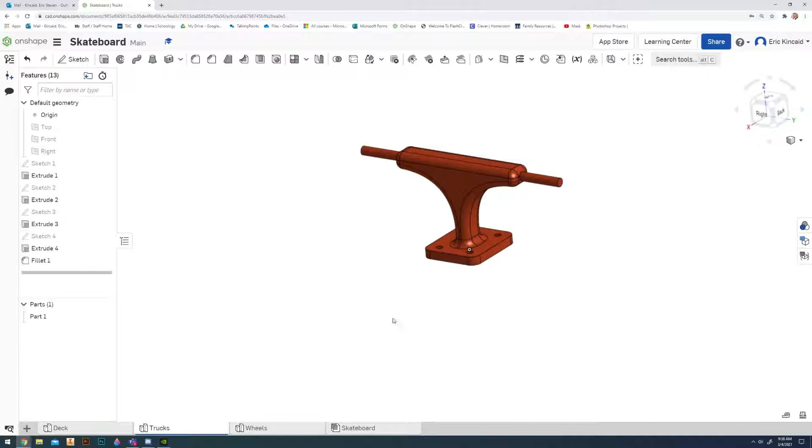All right, the other day we completed our deck for our skateboard. The next thing we're going to do are our trucks. The trucks are the thing that the wheels slide on, and then it gets attached to the board with some hardware. This part is pretty tricky, but once you see how it's completed, it gets a little easier.

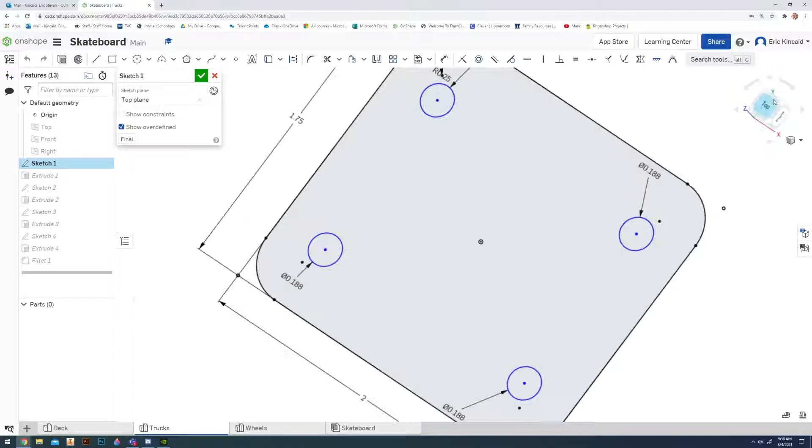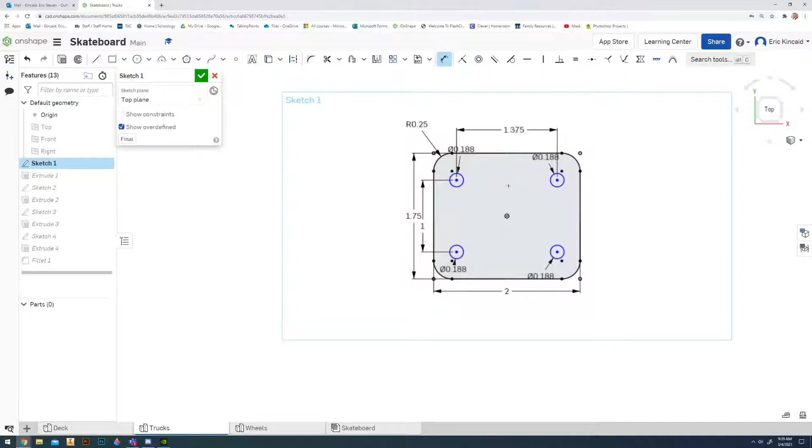First thing we need to do is take a look at our riser pad here. This is what is bolted to the board, and there are a couple different measurements we're going to need. The overall rectangle here is 2 inches by 1 3/4. It has a fillet on it that gives a radius of 0.25, and then there are 0.188, or 3/16 of an inch, holes that go through it, within a rectangle that is 1 inch by 1.375. So we actually have two different measurements here that we'll need to create.

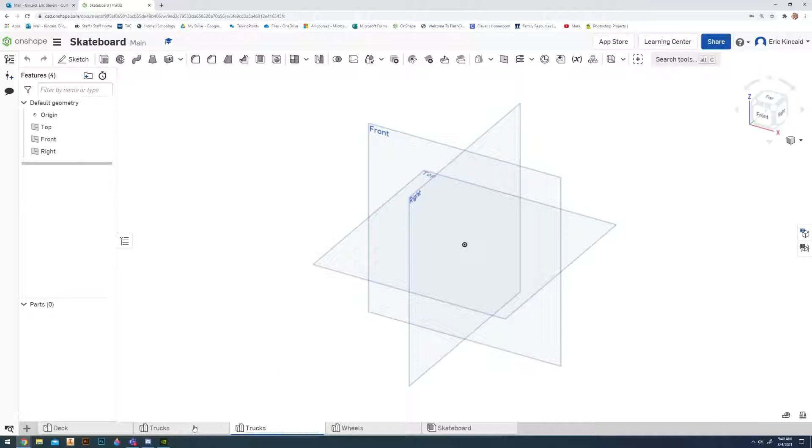Everything's based off of the origin point, so we're going to get started doing pretty much the same thing. Once you're ready, hit Create Part Studio, and we'll name it Trucks. Now obviously I have two, but that's okay. I'm going to grab my sketch, create a new sketch on the top plane, rotate my view, and instead of a corner rectangle, I'll grab a center point rectangle, click and drag out. That rectangle needs to be 1.375 by 1, and that's going to give us where to place our holes.

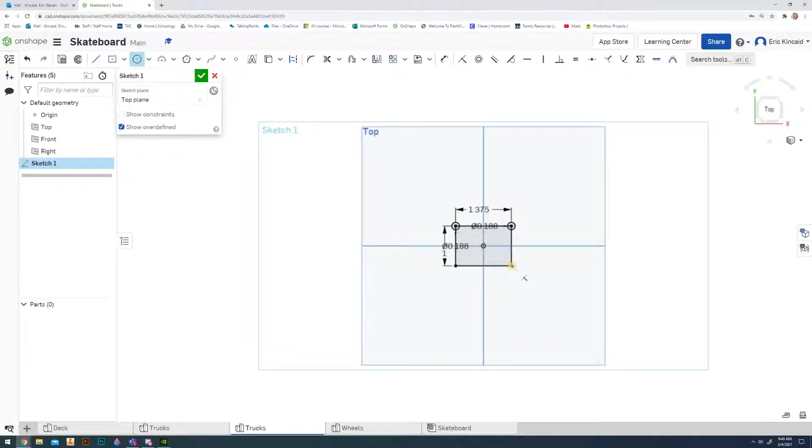1.375 by 1 - we could have made that a construction rectangle, but that's okay. We're going to grab our circle tool, and we're going to make that 3/16 on all four corners. So we just use that to position our holes - that's the only reason we did that.

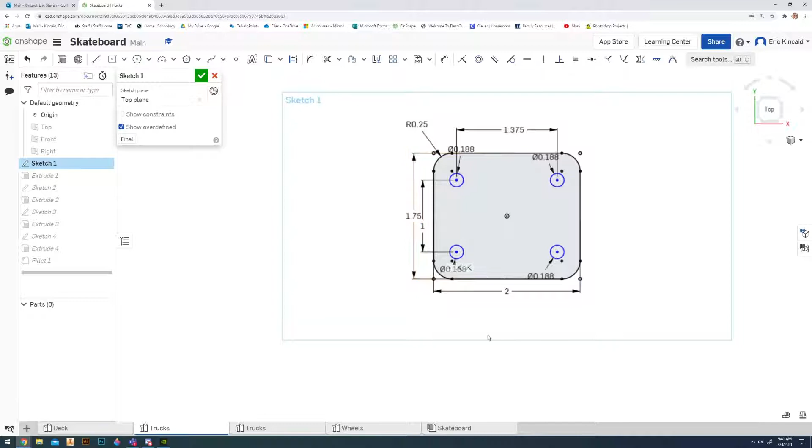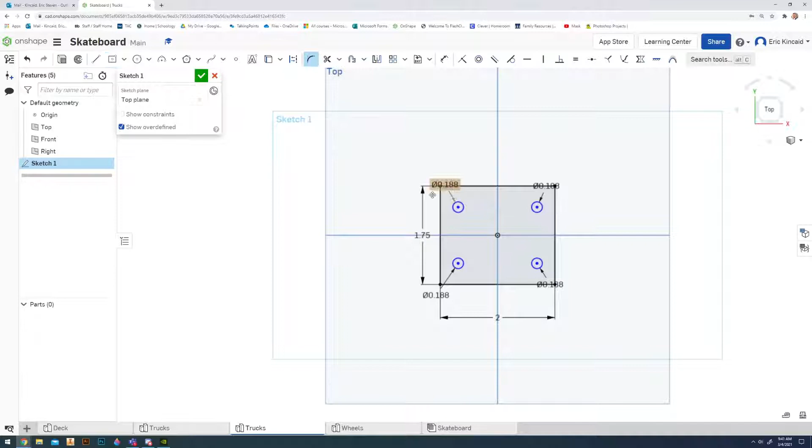So now I can make my outer rectangle, which is 1.75 by 2. Center point rectangle - that's 2 this direction and 1.75 this direction. And I can hit... oh no, don't hit the check mark yet, we got a fillet, of course. So we're going to grab the sketch fillet and click on each of those corners, and you can just leave the radius at 0.25 because that is already correct.

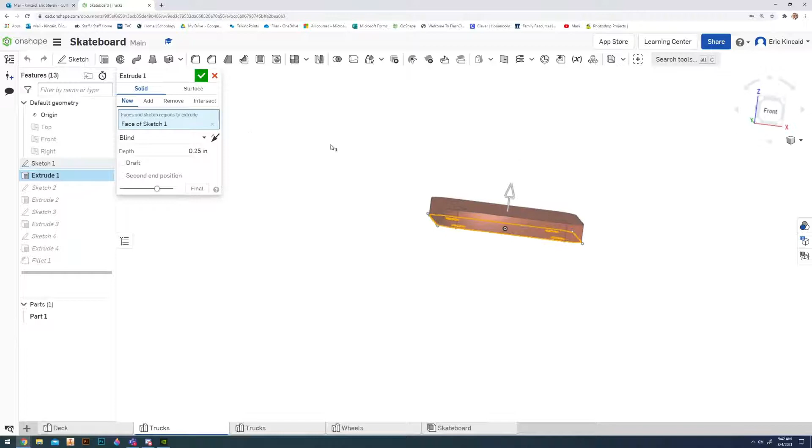That's going to create our riser pad, and we can actually extrude that - for this one, it's extruded 0.25. So just like that, we're going to extrude that out 0.25. All right, so there's our riser pad.

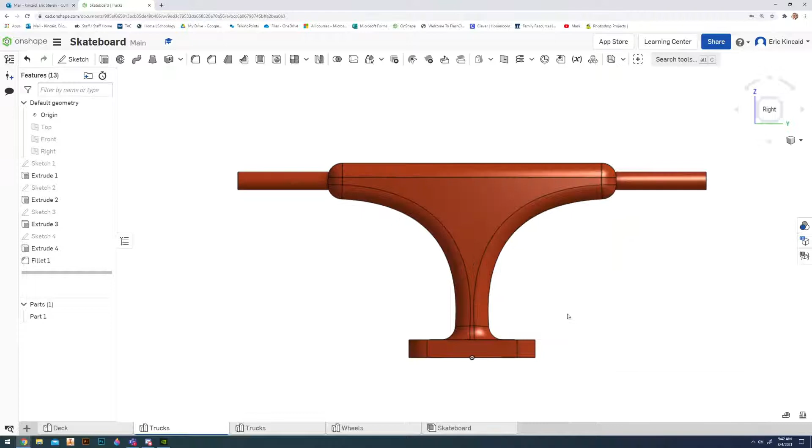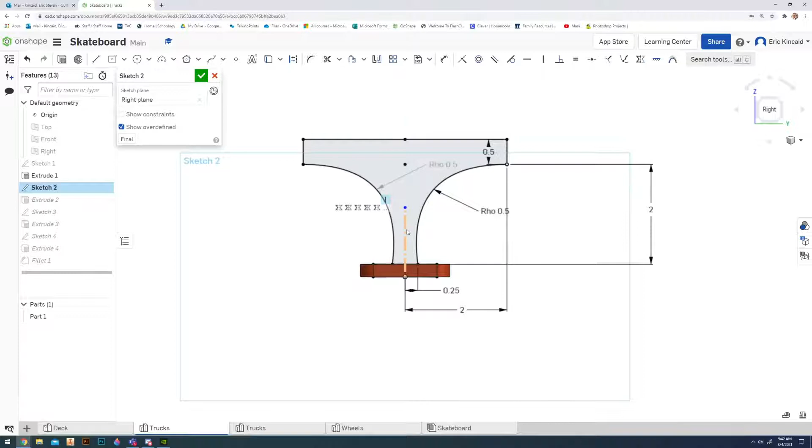Next thing we need to do is add the actual profile of the trucks themselves. It looks like our position here is from the right side, and let's go into Sketch 2 and check out what we got. Number one, we got a construction line, which means it's a symmetric part - this is obviously mirrored. So we draw half of it, use this construction line to help us, and then we can just mirror it to the other side.

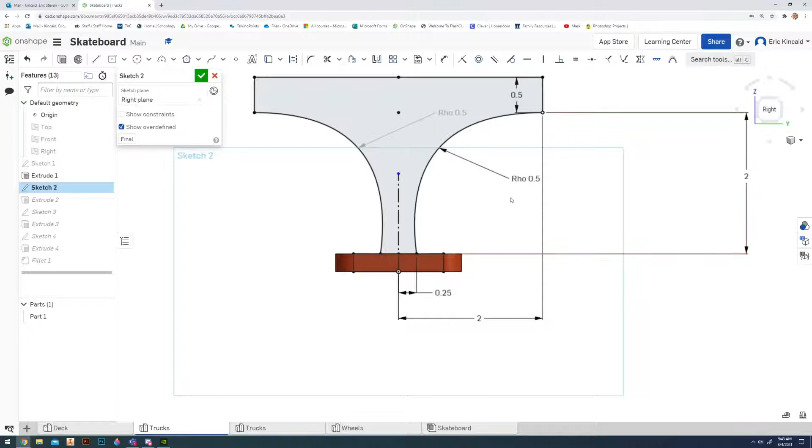So what we need to do is draw a construction line, place our 0.25 of an inch from our construction line on the top of that riser pad. Then we're going to place a point up here that is 2 inches by 2 inches away, and then we'll be able to create this arc that runs to it.

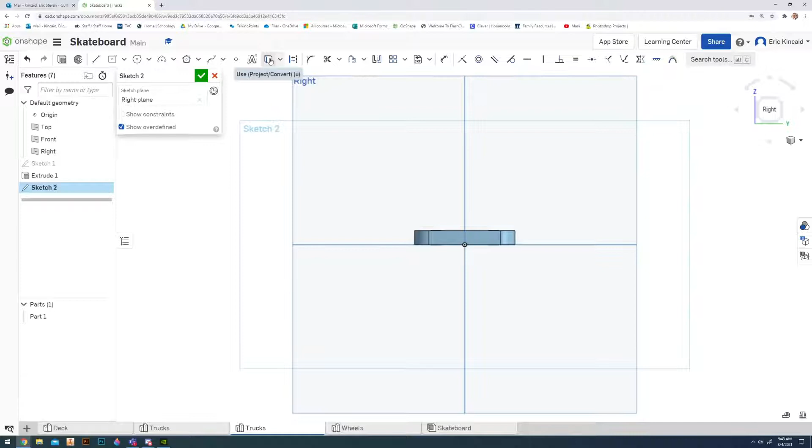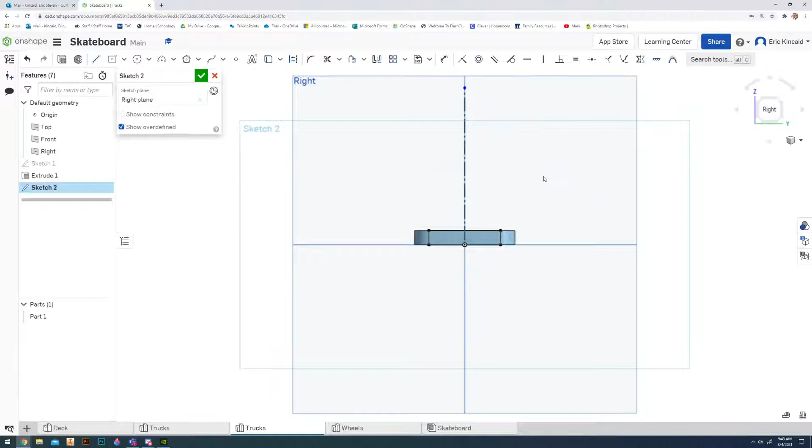So let's jump over to this one. I'm going to start my sketch on the right plane, and I'm going to use project convert - I'm going to use this part of the riser pad to project onto here so that I know I'm drawing on the top of my part. I'm going to grab my line tool, change it to a construction line, and just draw a line up - doesn't matter how tall it is, we're just going to use that as our mirror line anyway. And I'm going to draw a line over right here that is 0.25. So I clicked right at the top here, drew a line over 0.25.

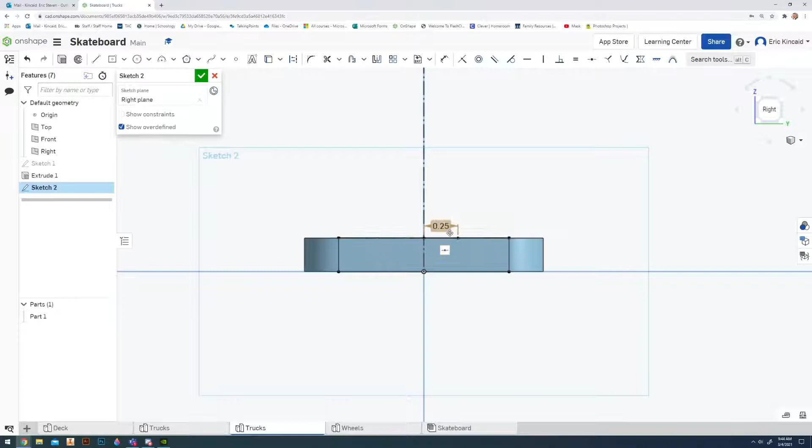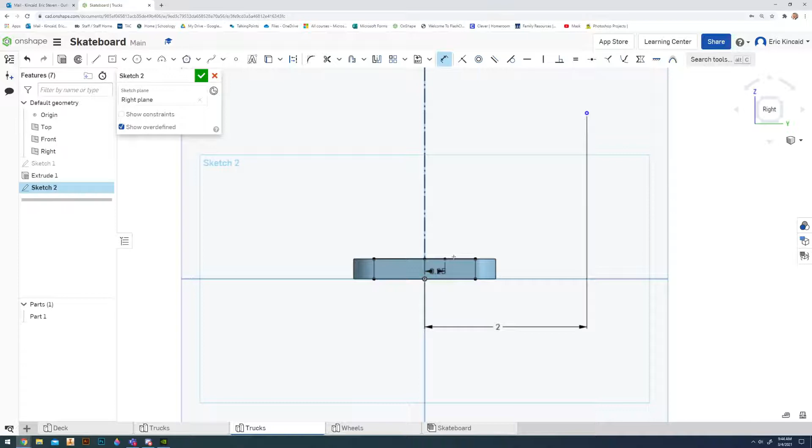Next thing I need to do is grab the point, and I'm just going to place it over here anywhere. I'm going to grab my dimension tool and position this point from the center. Let's take a look at it - how was it on here? 2 inches from the origin point and 2 inches from the top of this riser. So important information there because those are two different measurements. From here to here is 2 inches, and from here to the top of this riser is 2 inches. So 2 inches from the origin, 2 inches from the top of the riser, which means our overall height here is looking like it's 0.25 plus 2 - 2 1/4 so far once we get to this section.

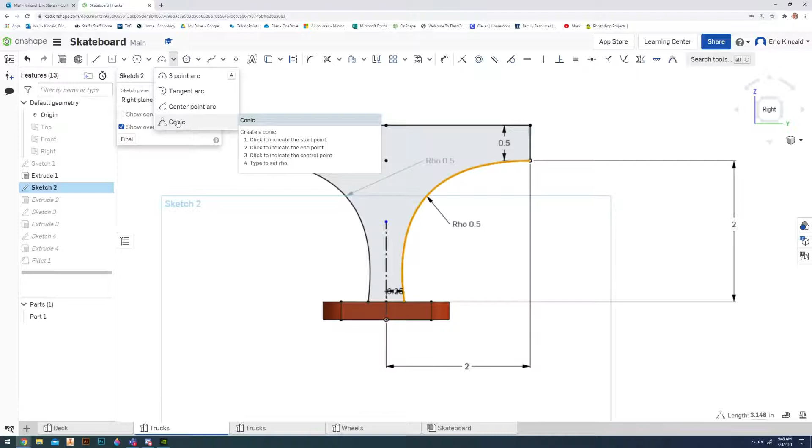So in order to make this arc, it says Rho is 0.5. We have a couple different options here, and the conic might be our solution. Let's see - we're going to click down on the arc, click conic, go to our point, and we're going to move it so that it locks in place just like that. See the dotted lines in a 90-degree angle? That'll bring it up to 0.5, and hit enter. All right, and that'll give you the arc that you need.

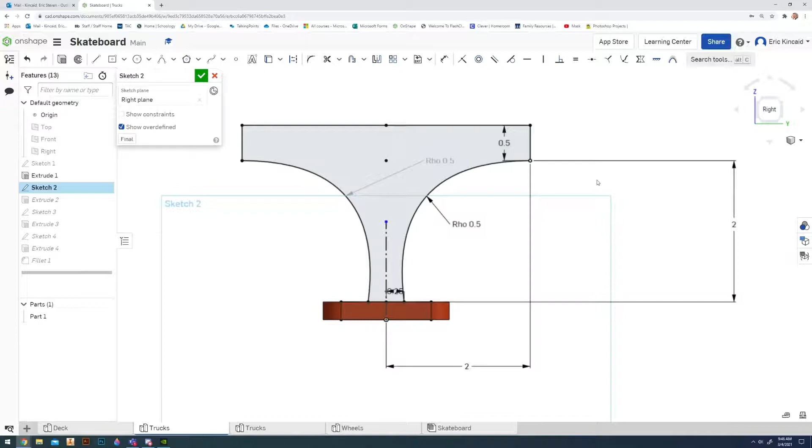Next we need to draw a line up 0.5 and bring it across to meet in the middle, so we have a nice symmetrical part that we can mirror. I'll grab my line tool, click on my point, and bring it up 0.5, then straight across. Make sure you're not connecting it to the construction line incorrectly, and that this is parallel.

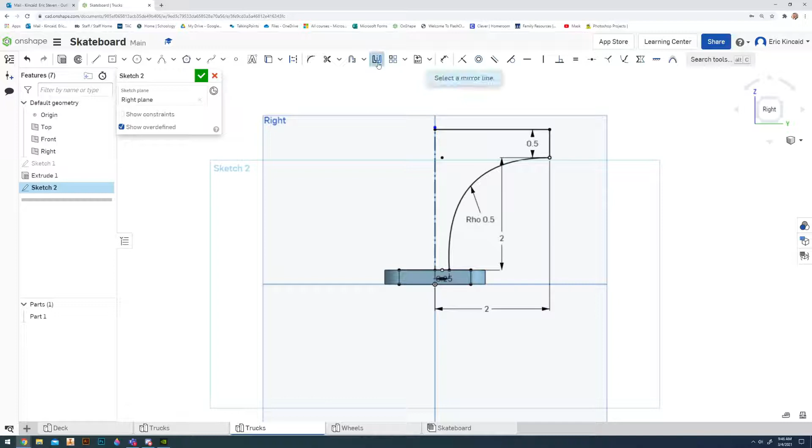We're going to mirror this. Grab the mirror tool, select your mirror line, which is that construction line, and mirror our arc. And there we go.

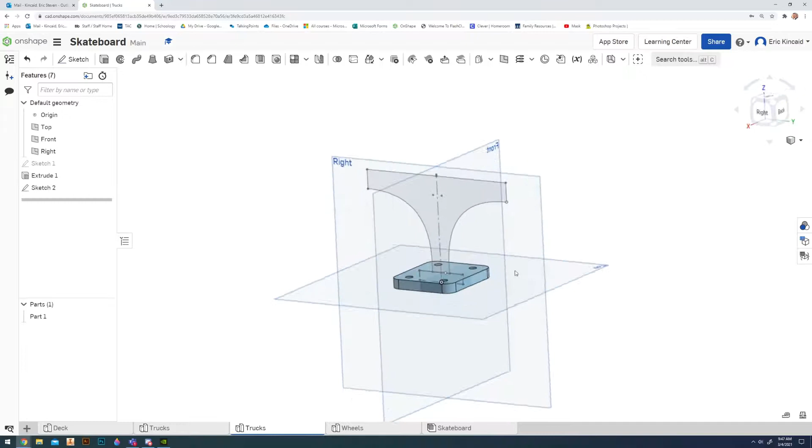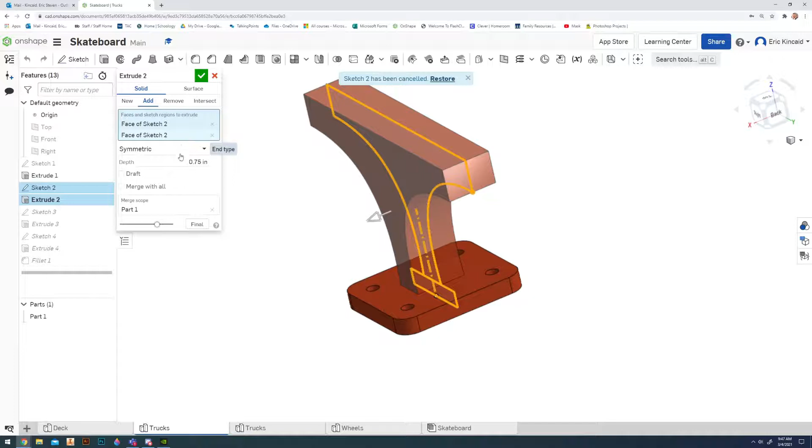Now whenever we extrude this, we're going to do something different than before. If we extrude it one direction, it goes towards the front or back, but if you look at the finished truck, it looks dead center. If we check our extrude options, it's extruded 0.75, but also extruded symmetrically. So we want to change our settings from blind to symmetric, and instead of 1 inch, we want 0.75. Hit enter, hit the green check, and we're getting there, though it looks kind of blocky.

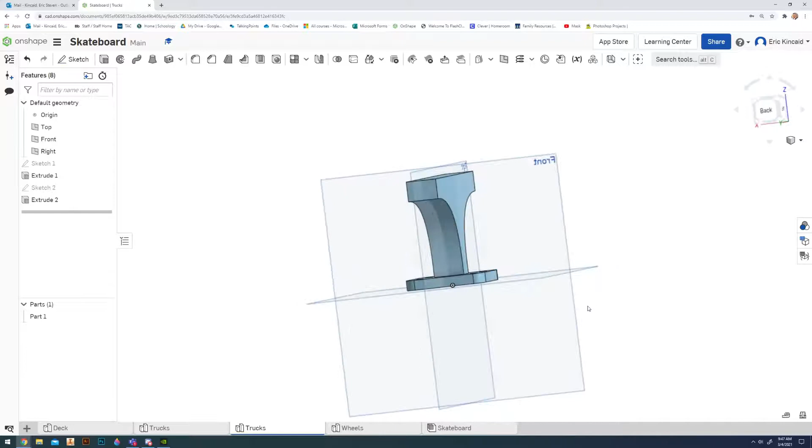We're not going to fillet our edges just yet, because we need to add where our axles will go - these items right here, where we attach the wheels. Those axles are 0.25 in diameter, and they are in the center of this rectangle.

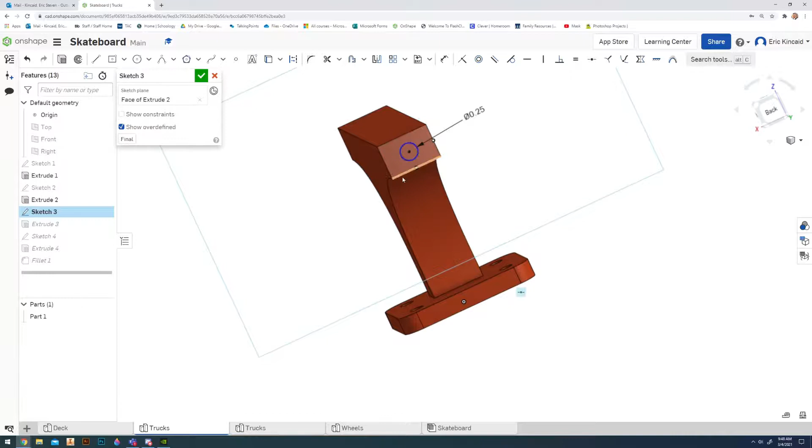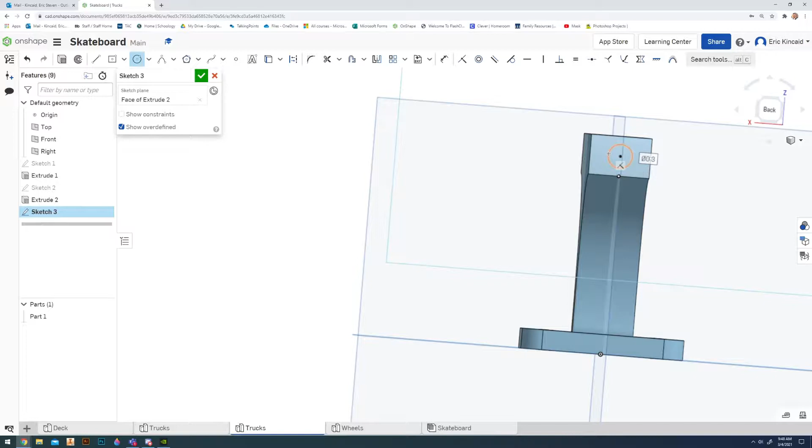We can use dimensions, or we can use the center points from both sides. We're going to start a sketch and click on that rectangle of the truck, because we want to start a sketch on this profile. Grab our center point circle, find our center point on either side, and bring our mouse over - you see that dotted yellow line? Move your mouse down, grab that one too, and bring it up so it meets in the center of those two. It'll place it perfectly in the center. You could do it with dimensions, but you don't have to. We're going to make that 0.25 and hit the check.

We're going to extrude that out. How far are we extruding that? We're going to take a look here, 1.25 inches. By default it's 1, we're just going to make it 1.25. Hit the check.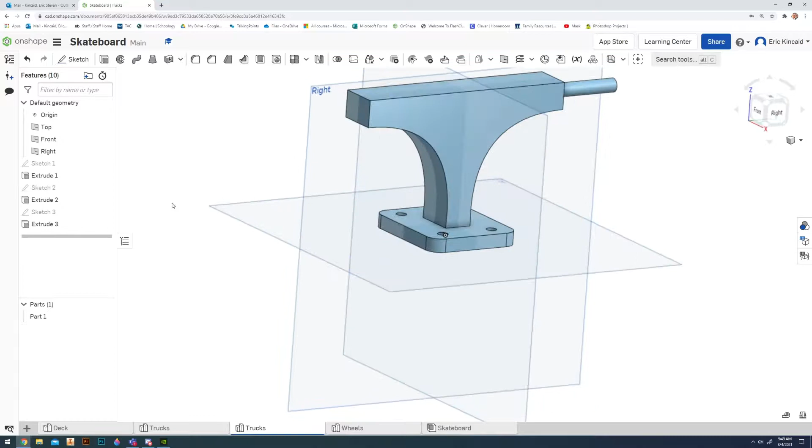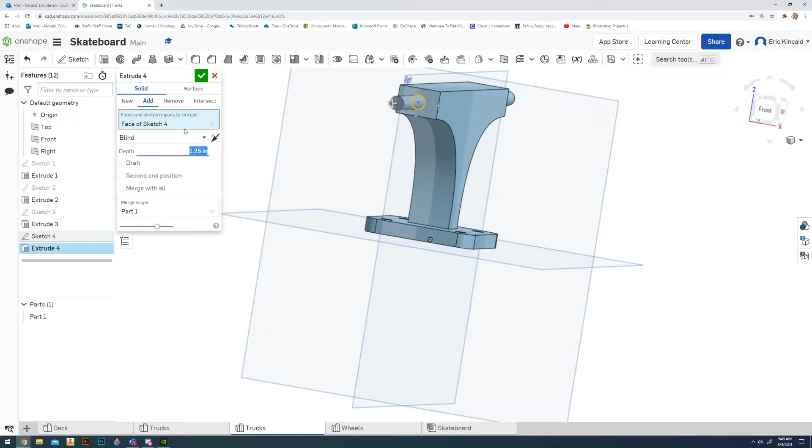We're going to do the same thing on the opposite side. Start a new sketch - you could mirror it, but make sure you grab the two center points from the left side and the bottom side. 0.25 and extrude it 1.25. Again, you could mirror those, but it's just as fast to do the sketch - it doesn't really matter, you can just do it.

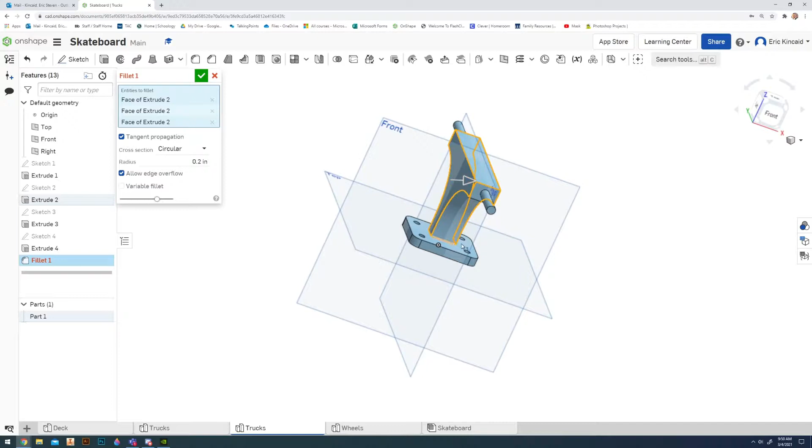The last thing we need to do is make this look less blocky, and we can do that by grabbing the fillet tool and clicking on every profile here. Whenever you select those three, it doesn't want to work.

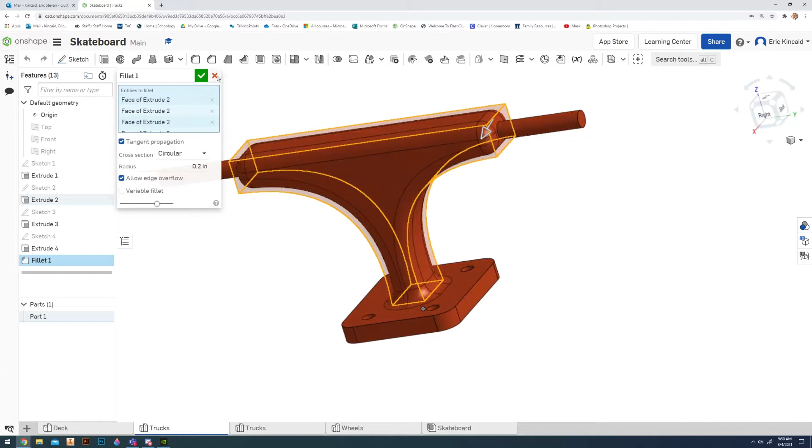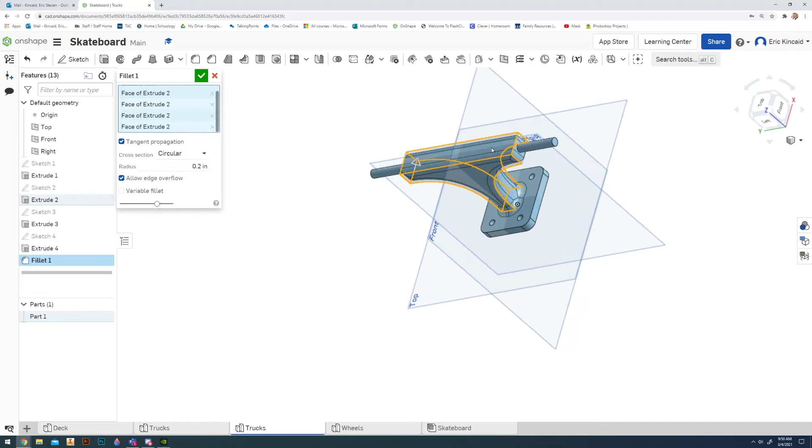How come? Let's see what did we select here. It worked on that one - why didn't it work on this one? So fillet, select that. It doesn't want to fillet. There we go - just got to select another one and then the top, and it fillets. So you just have to select every profile and then it snaps in. I don't know why it didn't work before.

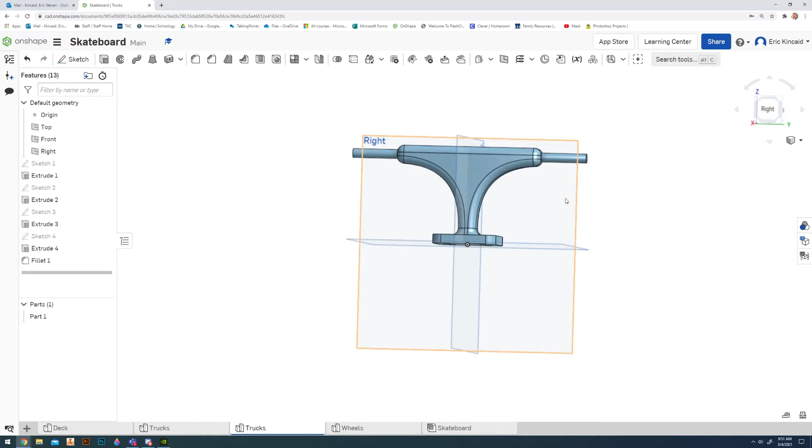Once every profile is selected, you can hit the check mark, and just like that you have the entire thing filleted, and it looks more realistic, like a normal truck. The only thing we're missing are the threads at the end of this, which we're going to place through the wheel, and then we can throw a nut on the end to simulate that. We're not going to get into threads just yet - we'll wait until we're a little more advanced.

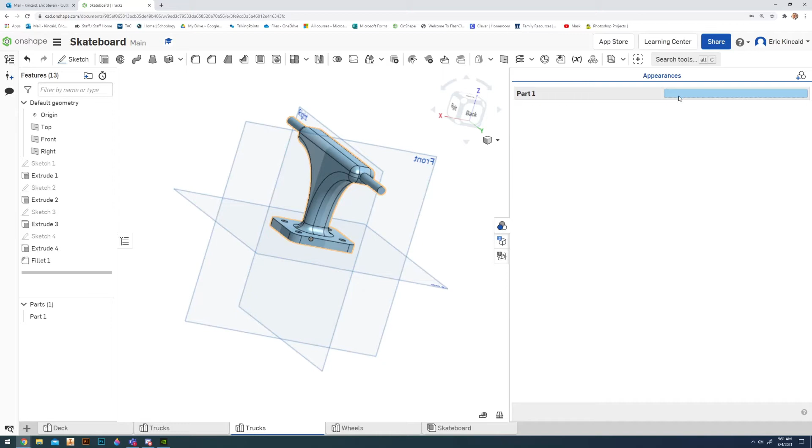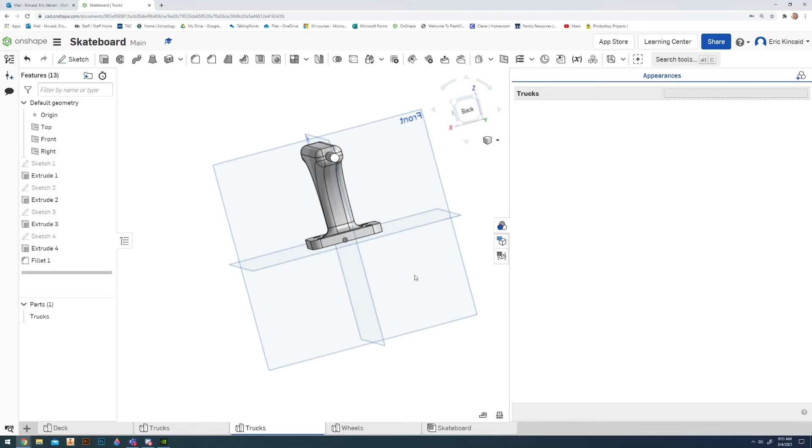Then you can change the color so that whenever we assemble it, your trucks will be a different color. Traditionally trucks are usually a bare metal look, but they do come painted. Then you just want to change your part name down here - you want to name it trucks. And that's it, you're ready to move on to the wheels starting tomorrow.